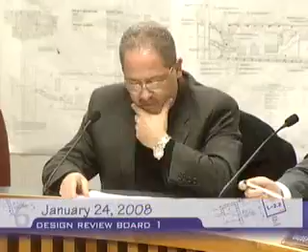Okay, good evening. Welcome to Design Review Board number 1 again. The first case is 1 PDR 2007-140B, 1234 Irving Avenue.

Good evening, Mr. Chair and members of the board. Presented before you is case number 1 PDR 2007-140-B, located at 1234 Irving Avenue. The applicant is proposing to construct a 2-story house, which will be 1,852.5 square foot, of which 991.1 will be on the first floor and 861.4 square foot will be on the second floor.

This case was first heard on January 10 of 2008 as a final review, and the decision was made to return for redesign with board comments. I will quickly go over the board's comments from the last hearing.

First comment made by the board was to eliminate the second story balcony in the rear of the building. As you can see, posted behind you on the left side are the old plans, and on the right side are the new plans. The applicant has met this condition by eliminating the second story balcony in the back, which was imposing privacy impact on the neighbor to the south of the project.

Second comment made by the board was to look into the options of eliminating the balconies and open terraces overall throughout the project. The applicant has reduced the number of open terraces and balconies by about half, according to the applicant.

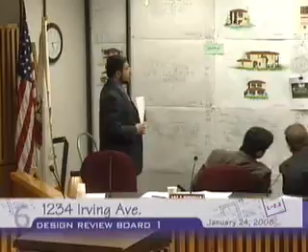The third comment was to explore the options of relocating the entrance to the front of the building. Initially, the applicant was proposing to have the entrance to the side, to the south side of the building, and the applicant has decided to move the entrance to the front of the building, which is seen on the site plan right here. So the applicant has made that comment too.

Another comment was to switch the family room, the kitchen, and the dining room to eliminate patio area in the back. The applicant has switched rooms around. As you can see on the first floor plan, the family room was in the front of the house, and now it has been relocated to the back of the house.

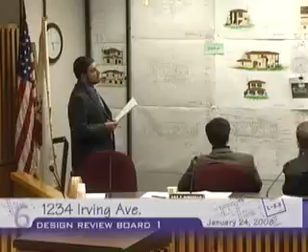Staff also has some comments. Staff believes that the applicant has artfully fulfilled the comments and conditions made by the board. By removing the second-story balcony in the rear and relocating the entrance to the front, the applicant has attempted to eliminate the privacy impact that could be potentially imposed on the neighbors to the south of the project site. The design is consistent with the neighborhood, which is Spanish. The proposed project is in compliance with the zoning code, and staff recommends approval of the project.

The applicant is in the audience, and if you do have any questions, I also will be available. Do we have any questions from the staff? So there was one comment, the second and the third.

Could you repeat the board comment or staff comment? The board comment was to explore the options of relocating the entrance to the front of the building. And how was that?

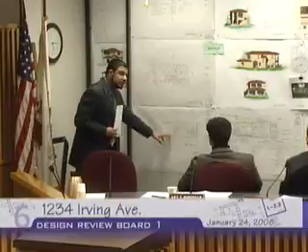As you can see on the initially proposed site plan, the entrance is on the side of the building facing south, and the applicant has relocated it from the side to the front, which is right here.

And what's happening in that little patio? Is there a patio? This will be, I don't know if you want to call it a balcony, a covered patio. That will be right here? Yes, it would be this one. So that's where the old entry was? Yes. But the street is that way? Street would be here. Okay.

And then what about number 3? I think that's a comment. That was the comment, number 3. What was number 2? Number 2 was to look at the options of eliminating the balconies and the terraces throughout.

The concern was that all the balconies were covered balconies rather than open balconies. And the concern was to eliminate basically the overhang above it or treat it differently so we actually reduce the mass.

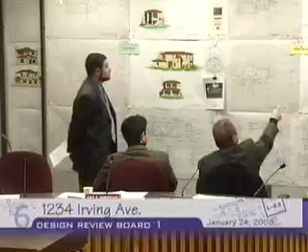So this right here, there was a balcony here. Yes, that was one of the issues. But we had other balconies in front which we can see there. Even the second-story balconies in the front, he has maintained them, but he has reduced them in size. I will let him go more in depth about those.

Question for staff: with the new system, was this one of the projects where the applicant got together with staff and went back and forth on it initially? As submitted, no. But when it was returned for redesign, the applicant did submit the plans. We did not have color elevation right away, but I did run it. I did take it by Stephanie. She did look at it, and she did feel that the applicant has met the condition.

Comments. Okay, any other questions from the staff? No, Mr. Moynihan? No? Thank you very much. All right, let's move on.

So I have a couple of cards on this project. Mr. Edward Hagopian, please state your name and address for the record. Good afternoon, Mr. Chair and board members. My name is Edward Hagopian. I'm the architect of this project. My address is 220 South Kenwood Street, Suite 210, Glendale, 91205.

That's my address. I believe I have responded to all these comments of the design review board. Other than that, I don't have much to say. If you have any questions, that will be it, because the only thing I would like to mention again is that I am very sensitive to the houses that are east-west.

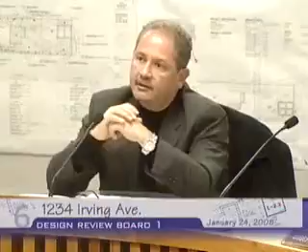It's a covered patio, but the main thing is that the living room and family room have been moved to the rear of the house, and I've eliminated almost most of that patio in that section. The entrance was removed from that side and replaced, since the neighbors' concern was people entering from that side. Do you have any questions from the applicant?

Thank you very much, we'll call you for rebuttal. So the second card I have is Sarah Conrad. Please state your name and address for the record. Sarah Conrad, 1232 Irving, we're the neighbors to the southwest.

We think the building looks a lot better from the street, and more balanced from our perspective, and we appreciate having the balcony eliminated. As far as the sun beating down, they do make window shades. We have five windows on our rear elevation, and we've lived there 28 years without any shades, though this past summer we thought we ought to buy a shade for one of these windows. So I think there are ways to work around that without adding the balcony back onto the building.

I like the landscape plan. I see a landscape architect did it this time, and it really shows the improvement. I just had a question about the wooden fence, what the height would be. I couldn't see if it was specified, whether it was going to be 5 feet or 6 feet.

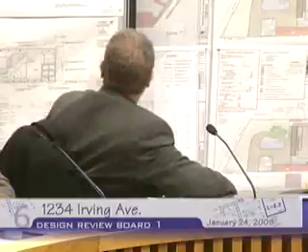I think this could have been treated a little differently. I see this area here - when you're entering, we're not taking advantage of this space, and to me this is like a redundant patio. We've got patios - like 6 patios in different places.

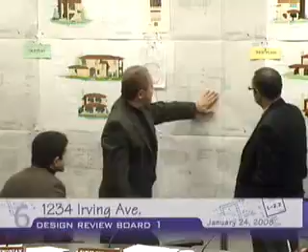I appreciate what happened here, because this is the correct way of doing it, where we have the family towards the recreation room - that was one of our comments, which is fine. So you've got the kitchen, and plan-wise, the kitchen, dining, family, and living are working fine.

But the problem is that once we did this, suddenly we have a bathroom right in between 2 patios. So I feel that this area here is kind of weak, and the function shows in the final product. You have all these niches, but in reality you have this wall that is really just a plain wall.

Here is the entry - the nice entry feature he had with this precast element, which was very classic and very nice. That's kind of lost. I was hoping that when we brought the front entry from the front, we could have incorporated some of that over here.

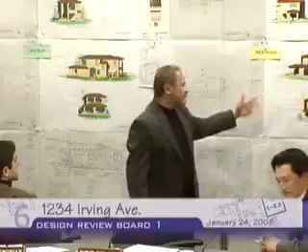And this, going in and then entering from the left-hand side, it's just not justified. I mean, we can go ahead and approve the project. I'm not saying this is a make it or break it, but I think there's room for improvement in this area, and it's kind of a shame to just let it go.

As far as the fireplace is concerned, I concur with Mr. Aliano - sometimes when you have a fireplace that serves only the first story... one way of handling that is if it had been connected to the second floor somehow, with more space or some sort of closet, then we wouldn't have had to have this thing sticking up.

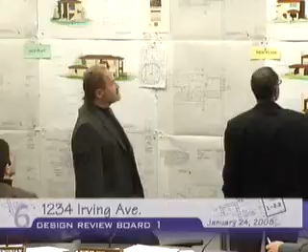So those are the discussion points I'm concerned about as far as the design is concerned. I think he has responded in their own way. I'm very happy about the landscaping - I think this is a good landscape plan. But I think the front is just kind of weak to me.

And if there's no way of improving it, that's different. But we're not dealing with an addition per se - this is basically a brand-new building. So when it's a brand-new building, there's so much you can do as far as the entry is concerned. And still, I understand Mr. Akopian's point about the west and east - it's a very good point. But the thing is that this is now cantilevering out, or overhanging about 6 feet or whatever we have there.

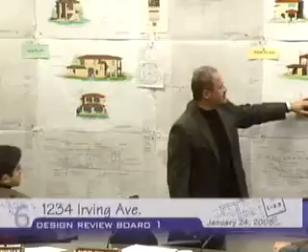Normally, we could have had the same amount of shadow here if it was not cantilevered 6 feet, or if this was over here, for instance, it would cast the same amount of shadow over here. So some sort of a compromise could have been reached in this area here.

And I'm not too sure about this, but this area here, there was a privacy issue, which he's eliminated the balcony. So I'm okay with the back side of it. My main concern will be the front of it, which was lost in this whole exercise.

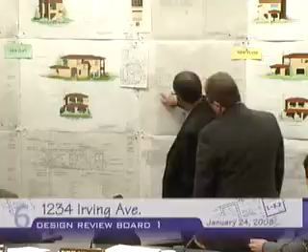And I don't want, even if we approve it, I don't want this thing to be viewed as we have prescribed this entry, because I don't want to put my name on this entry. Is it possible, Mr. Agovian, if you stretched this out more, and put the entry right there in between the two forms?

In other words, you could actually even make your bathroom bigger. I don't know if you can add more square footage, probably have the FAR. I think what he was saying is that if he brings the door over here, it's kind of narrow, and he gets a narrow window and narrow kind of element over here.

So his concern from the beginning was this, that this is narrow. That's true, we said it is narrow. We understand that. But I'm just questioning, why do we actually need this? Why doesn't this continue like this, so you can see the door itself?

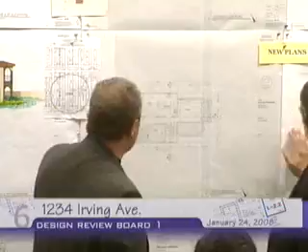Or why can't this elongate over here and then put a nice door over here? Forget about this patio over here. But this could be the entry right here, right? Yeah, that's what I'm saying. It could be the entry right there.

Now, he doesn't want to come right in front of this long corridor, which I understand. And then he doesn't want to, with the same token, open the door and face the wall there. There is quite a bit though. But if the doors were here, you're entering a vestibule, right?

Square footage, square footage. Mr. Akopian, we'll ask you. Well, Mr. Ariana asked me questions. You don't have enough FAR for that. We have 1 square foot left. One, yeah, the thickness of the door.

Well, again, it's one of those things. It would be nice to have it facing, but.

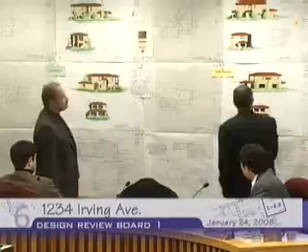I wonder if there's something that you can do on this wall, maybe a niche or something that kind of marks it. Yeah, I can put the same thing that we had on that facade into this, some tile work on this wall that sort of marks it in plan, right?

If he puts something like this there in the entry, then the door has to actually face us. It really defeats the purpose of putting the door there. I don't know about this wall here, if you create like a niche. What's appealing about that elevation is the fact that there is the border around the door, the entrance, and then this very nice, eloquent, classical.

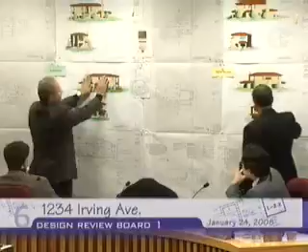Yeah, see what I'm saying? If this was the front of the building, why don't you make this solid? Why not make this solid and carve that door here? And even if the door is not there.

We will ask you, Mr. Akopian. So what I'm saying is, if this was not here, like an island, if this was over here, then we have an opportunity of having a rhythm like this, where this is actually going to be a nice entry courtyard. So you could have had a nice entry courtyard when you're coming in. Right, we're not going to obviously design it for them, but he's got a point.

He's got this balcony that ends right up above here, somewhere in here. Somewhere there. Yeah, so he's trying to reconcile all these things.

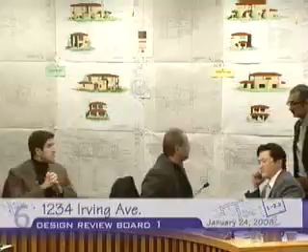Okay, it's just no, my very good point. Personal, I agree with your feeling. I mean, if you guys are okay with it, that's fine. Well, at this point, unless we haven't reworked it. Okay, I don't know how you feel about that, but all right, then. I was not, that's fine. Do you have any other comments, or do you think?

I think if we are going to accept this entry, it would be nice for that back wall to have something, so that when you have some kind of axis that leads you to that point, even though it's not the entry, it's quite typical of this style to have things on walls that create focal points. Typically when we have a corner, a 90-degree setback, the entryway is kind of a short turret that you enter on an angle, which we don't have here. We see other Spanish-type buildings done the same way.

What compromise could have been made is that he could have used the same precast entry and everything, and perhaps come in, not necessarily putting the door in front of it, but on the side. At least it would announce an entry there, rather than just having these niches that people will just come in and then go in.

The thing about this is that you have sort of a point sitting on this roof, which actually visually has no support. There's nothing visually that ties this to the base of the building.

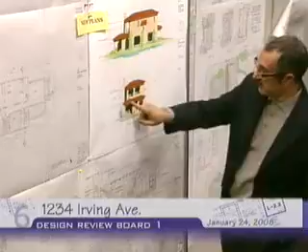I wonder if through the turret here, this could be brought in where maybe it aligns, so this patio may have three arches or maybe something else. Then you can elongate this piece a little bit and still make it an exterior patio, but now you'd have more of something like that. This could even have some other shape.

Maybe it could be diagonal or something, sort of typical of this style, where you have turrets in these kinds of buildings. So you could do something here where you come in and enter, which is actually, you drive anywhere, even in LA, you have these buildings with turrets, little turrets, where the entrance sometimes isn't seen, but you do see the little turret, a defined aspect of it.

Maybe that could happen here, which is easy to do, I think, without adding square footage. The only thing that would have to occur is that this balcony here would have to be brought in, which eliminates that door.

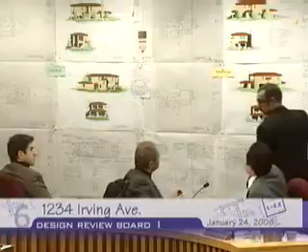That's better. Well, that's one way of looking at it, to create that turret. But let's say if it's turretless, at least if he has a strong element over here, generally speaking, normally this is like a fixed window, a picture window, a nicely treated window, so it goes away from all this, the same type of roofs and everything.

You know what I mean? So if this was that kind of treatment in front of the living room, we could have left this side alone, let it go by, but this could have been a small loggia or something. If this distance equals that distance, we can see there will just be a colonnade over here, so when you're entering, you can enter from the side, into the colonnade, rather than having it in front of you. So those are the combinations I'm saying we could have there as an entry.

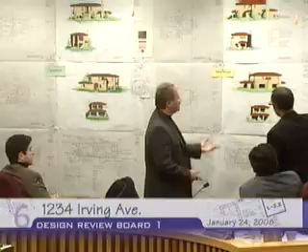So I don't know if there's any way we can put some sort of condition that he would rethink that area just for the entry alone. Well, perhaps staff can review it, because I believe that based on the new procedures, staff has a sort of... I believe, say so, yes.

Staff's priority was to review that the very specific comments and the intent of the comments were satisfied.

So we did not do a more thorough review or question some of the elements, such as the chimney, the window pattern, etc. We can do that in the future if the board so directs us or would like to see that. So that's just for your information.

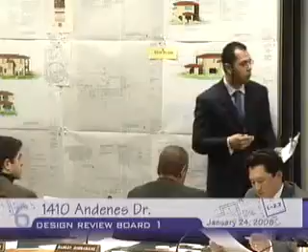Good afternoon, Mr. Chair, board members. The next case item before you is case number 1-PDR-2007-121-A, located at 1410 Andenes Drive. This case was continued on January 10th. The board had a few comments. The applicant was able to provide the plans as of this afternoon, but staff has not formally gone over it. To get to your comment, Mr. Simonian, it has not gone through our urban design team to look at the design concepts.

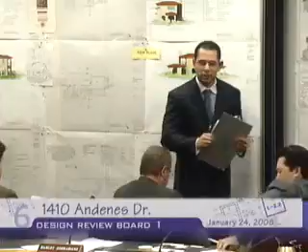We did look over zoning issues. It does not appear that the square footage has been adjusted drastically—the applicant can definitely verify that—but I can go over the comments and conditions the board had two weeks ago. Condition number 1: the applicant was to provide eighth-scale plans for better clarification and clear depiction. Condition number 2: provide 50% calculations to reassure that the scope of work will not trigger new construction regulations. Condition number 3: provide a site plan overlay of both proposed first and second story. Condition number 4 was to restudy the fascia board size.

Condition number 5 was to restudy the south elevation. Number 6 was that the color chart appears too dark; the applicant has provided a new color scheme. Condition number 7 was to restudy the placement of the shutters.

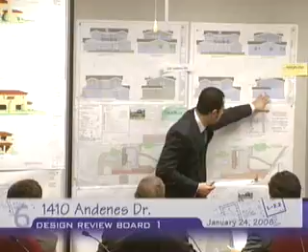These are the previous plans the board saw on the 10th, and to your right are the new submitted plans. The applicant has removed the shutters and introduced a new window on this elevation. The applicant has also indicated calculations stating he is not demolishing more than 50%. I have not yet verified this with building and safety, but it will happen.

That basically concludes my presentation. I'd be happy to answer any questions.

Do you have any questions from the staff? The applicant has provided some responses in letter format for the board members.

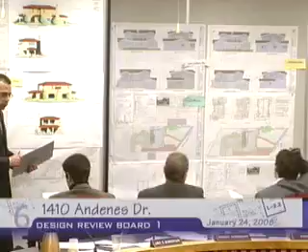Insofar as the south elevation, what have they done as far as changes? It was regarding that this elevation lacked detail. As I'm seeing here, the only thing we did was the removal of the shutters along with an introduction of this window.

Did we ask for the shutters to be removed? No, the idea was to make them more compatible with the overall design. We never said to remove them. In fact, it looked much better with them on than it does today.

But again, it hasn't gone through the urban design group. It's just come back quickly. Correct, it was within the two-week span.

Can that be fixed? I mean, why should we look at it if they haven't had an opportunity to look at it? Just because we wanted to have it fast? No, I think whenever we send cases for continuation it's because of not providing information.

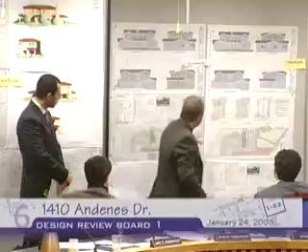In other words, we lacked information. The way it was presented to us, when you see the site plan, it just shows the roof. We really didn't understand what the plans were, the adjacencies. The plans were not shown before. So we wanted an eighth-inch plan superimposed on the site, so we could see the proximity to the existing trees, which are important, and how they're laid out. We still haven't had that plan here.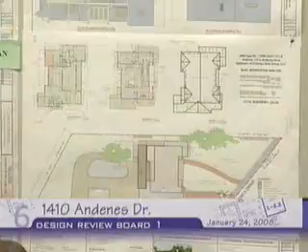No, we have the eighth-inch plans here, but they're just not on the site themselves. And this is only trying to answer one of our concerns: are we going over 50% removal? Because if that happens, our setbacks are different than before. So we clearly didn't have enough information last time. That's why we continued it.

Well, I have a general statement to make, but I don't think it's a question for staff, so I have no questions for staff. Thank you. Okay, thank you very much. All right.

Okay, so I have only one card here. Rafael, yes please, state your name and address for the record. Rafael Quezada, 787 West Woodbury Road, Altadena. Are you the designer of the project? Yes, designer of the project.

With respect to the overlays and the eighth-inch scale site plan, as I understood it, you needed to see how they relate to the setbacks and so forth. So, can I approach the chart? Yes please, the pointer is there if you need it.

These areas here are now more visibly shown. This is the area that is remodeled on the first floor, this being the first floor plan. There's a small area here, an addition to the family room, an addition to this bedroom. The next shows the same color scheme with an overlay of this violet color, which is the second floor. These match in the same color scheme, more or less, where red shows the addition, the main part of it. There's a small porch addition, but it's really not an addition, just a remodeled area. The outline matches this site plan so you can see the setback to the trees.

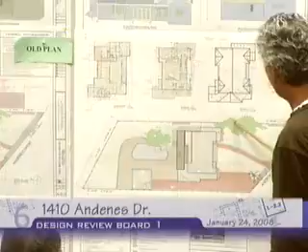I want to clarify, on the 11 by 17, as I was trying to explain, the city's printout requirement is to reduce the entire plan to fit 11 by 17. It didn't wind up perfectly at 1/8 or 3/16 scale; it had to be scrunched to make it happen. So what you saw was inaccurate, and I didn't catch that, I apologize, but what you saw was not accurate in terms of the setback or the driveway. This is a 9 foot 2 inch driveway.

It meets the requirement. This is a 5 foot plus setback, which meets the requirement. So in terms of what might be triggered regarding new regulations, those are not issues.

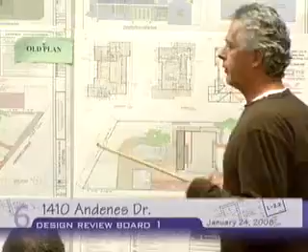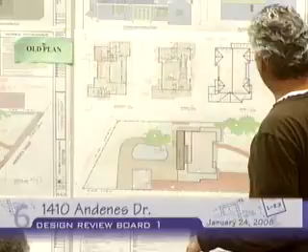In terms of the modification of the building and the percentage I arrived at, what I did was calculate the total lineal footage of all partitions, exterior and interior, and gave them all a nominal 9-foot height. Then I took the walls being removed, interior and exterior, with the same nominal 9-foot height, calculated percentages, and came up with 13% in terms of partitions. Then I took the roof in terms of its overall plan and how much of it was going to be modified, and the two added together and divided as an average came to 29.5%.

I have a comment to make there, because this is not the way it's calculated in the city of Glendale. The calculation does not include the interior walls, only the exterior walls. In that case, it's even less. It's fine, okay.

What we care about is that when we go ahead and approve these plans, when it goes through the process, there are a couple of things that can happen. First, you can come back and say, well this is approved and this is the way I have it. We want to eliminate that. Maybe not you, but some other person or whoever.

Second, if it goes through to construction, there's no approved prescribed definition of what is 50% or not. And it's bad for you, bad for the city, and it creates misunderstandings later on. Now, I understand we can monitor that, but everyone, at least when putting the information there, should stick to the prescribed method.

What you need to do is take the exterior area of the exterior walls plus the area of the roof itself together, because they both count. You could be removing most of the roof but not removing the exterior walls, so there's a balance there. There's a particular method to calculate it, which is not what is already indicated there.

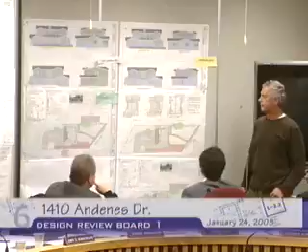But if you add the roof area—you're saying only the exterior walls? Exterior walls, nothing to do with the interior. Interior walls come into play for your sprinkler system, but when you go through building and safety, they're going to look at that in addition to what you're doing.

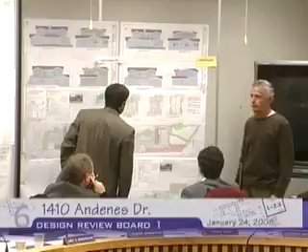So I erred on the side of caution in that I did include the demolition portions of the interior, and this probably is more like 25% overall. When you qualify the roof area that's going to be affected, you're virtually removing most of the roof in order to retrofit the second floor. There is re-roofing of the first floor required, but it's really a cut-in and modification of framing. Part of the scheme of the design is to maintain the existing house as it was previously, only modifying where re-roofing is required or where a match to a certain line is necessary.

You realize that based on the description, if it goes more than the 50% removal rule, then you're going to observe new setbacks—your minimum setback will go all the way to 10 feet. That's what I'm trying to tell you. Sure, I understand what's at stake.

Okay, so is there more square footage being added on the second floor compared to this plan? No. Honestly, I don't know how this got here, other than there was a draftsman working at that time, long ago when we made the submission.

This diagram matches this footprint. There you go—we had concerns about that too, because we couldn't read that plan well. It was impossible to understand the overall layout. This is the actual footprint, and you can see how it lines up here.

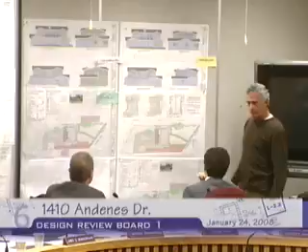Right, so that kind of concerns me about your roof count on the percentage, because it doesn't pass the eyeball test. That's more than 46% of the thing you're going to have... but that's not as big a combination as all the exterior walls added to that. Right, you might be under 50, I'm just saying it's probably closer to 30-something than 20.

The thing is, if we miss something, you'll get caught. No, it just makes things more difficult, that's fine. We're trying to make it easier for you to disclose. No, I understand, and I appreciate it.

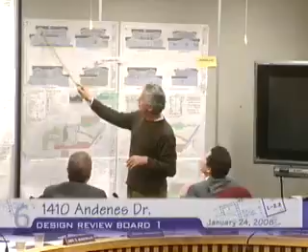The question regards shutters. Your objection, Mr. Simonian, as I understood it previously, was that it didn't make sense to have the shutters if they don't match on the other side. You took issue with why these shutters were here when they should be on both sides of the windows. My response was that the owner wishes to keep the existing scheme on the house, and to balance their desire with your aesthetic concern, since they don't want to change all the first floor windows and want these to match, the solution seemed to be to eliminate the shutter if it doesn't make sense to the board, so now they all match and the first floor windows didn't have to be changed.

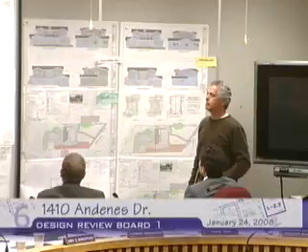Well, without getting into a long-winded discussion, I think there was a misunderstanding. Did I mischaracterize your concern? I think there's something nice about the shutters, and for a one-story home it does work. But you're saying this doesn't make sense if it's only on one side of the window. So if you want to keep the shutters, the solution is to change the windows, but you're imposing a huge cost and expense on the owner to change out windows just to match an aesthetic concern.

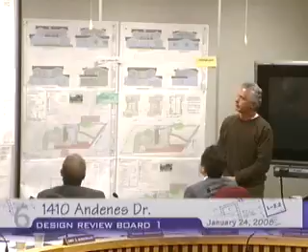So if the shutter is the issue and it can't match, then... Again, without going really into it, which I don't think is the time to do right now, but you're missing my point. It goes back to some of the comments I made earlier, where we prescribe some conditions and it's very easy to just check off the box and say we've done it. However, that is not the case here. So we'll address it, but I did have some questions for you.

Specifically about the color, we mentioned item number 6, where the color chart appears to be dark. Did you introduce new colors, or is it the same as before? It's the same color. We eliminated the black that was going to be a feature, a black shutter, but that Admiral Blue is the color they want for the house, and it's not out of line with many of the other houses in the neighborhood.

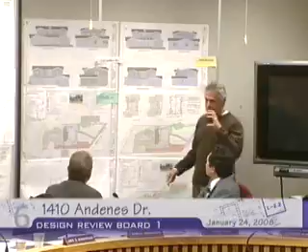And the other thing is, in terms of visual reaction to light, the darker color presents a smaller visual image than a brightly colored house that reflects more light. So the owner felt that Admiral Blue is the color they want, and they would eliminate the black, which was going to be a feature of the shutters, since the shutters are no longer part of the design.

So I can see that the fascia boards, you made them more realistic, going from 11 1/4, which would be nominal 12-inch, down to 7.5 for the 2x8. I think that comment I made was because the existing house looks much lighter on the roof than what you were depicting—it was kind of heavier on top. To balance it, we also made these match; they're now 7.5 rather than 5.5, which were 6x6.

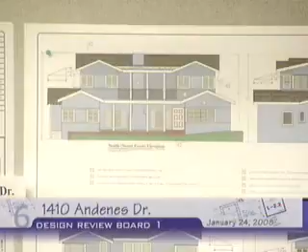There are also a few details you're changing which aren't depicted here. The existing house has wood siding on this side on top of it. Are you eliminating that? I think it didn't read well. You see what I mean? Because on the front, that's on the front.

That's the front of the house. Right, on the back, it's stucco. No, I understand, but I mean the front of the house, because you mentioned they want to keep the existing treatments and all. I don't believe that's...

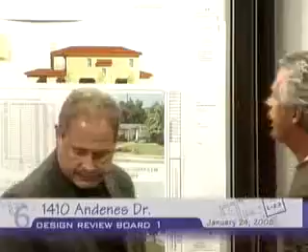No, you're looking at the roof, that's stucco there. But in answer to that question, the engineers weighed in, and because there's going to be some shear walls required, this is probably all going to be siding.

Nice. So on the site plan, is that the existing footprint of the house? Yes, this is the more accurate one, although the footprint of the existing house hasn't changed. It was this that was off. In other words, this is just a plain old existing site plan that portrays the existing location of the house as is. Right here, and here as well.

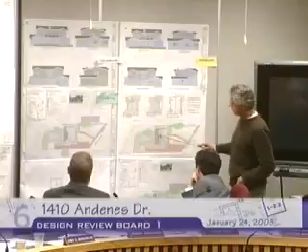This color, but that pink portion is an addition portion, correct? Exactly, this is the addition. And then you're also portraying the second floor, illustrating the second floor addition on this violet line.

That was what I understood was what you wanted, in order to be able to see the net effect of setbacks to trees and so forth, and the setback to the rest of the house, in terms of addition versus existing.

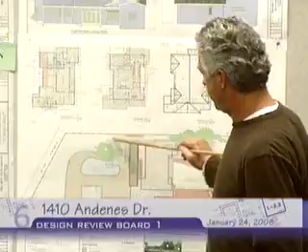And as far as preserving the protected oak tree, totally, do you have recommendations and everything already? Yes, and this is a sycamore, not an oak. The other one is the oak, and we're well beyond the 10-foot requirement on any new construction from the city.

Yes, I've talked with Bill McKinley. He's visited the site two times, and we've gone over and over what are solutions when you have to be up close, because I had another project where we did have to be near. So we've actually gone through the entire ordinance in terms of preservation.

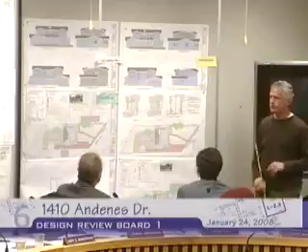But he gave you recommendations and requirements? None on this project. Well, the standard is you protect it, and you cannot allow the root structure to be disturbed. Generally speaking, they give you that information and you include it in the plans. Right, that's why.

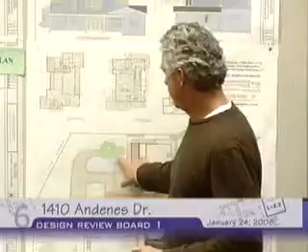It wasn't a requirement on this project because we're 20 feet, 32 feet, and 26 feet from this. Generally, when you're under the drip line is when all these larger concerns are triggered.

And I understand that, but not necessarily that's the only time, because whenever you have a protected oak tree, there are some prescribed requirements that you cannot disturb the tree itself, because during construction, when you're not there, people are going to go underneath the tree, they might by mistake dig underneath the drip line. You see what I'm saying? If you don't have those notes, those requirements there, that it needs to be protected. So we noticed those notes were missing from last time, and that was one of my concerns.

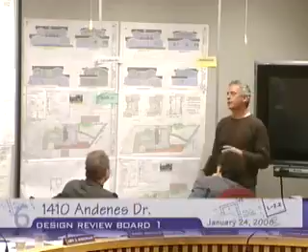What is the material of the existing fireplace? It's a slump block made of concrete, made to look like slump, like adobe, a typical concrete block. It's been painted over time. So again, they don't want to remove that, so we're going to add the same type of block in it.

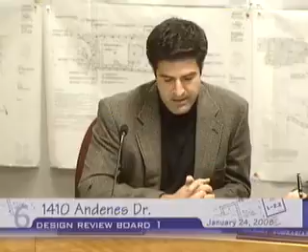The idea is to use this board and these comments to bring it back and make it a better design. I don't think that occurred this time because there were only 2 weeks, so the group hasn't had time to opine on it. The staff hasn't had time to really focus on it, and we haven't really received any drawings. We just got the conditions, that was it, and we're looking at the drawings for the first time.

A lot of the comments I made 2 weeks ago stand, so I don't think I should go over them one by one. I think the applicant could simply get the tape and hear them out and try to understand it.

But I think this is one of those instances where Ms. Reich is going to have to work very closely with the applicant to go through this process, because this might take a little bit of effort. As I was saying, this is one of those instances where it's going to be beneficial for your group to really sit down with the drafter, with the designer, because I think there's going to be miscommunication going back and forth. It's happened in the past, and we're trying to avoid that.

I'm not going to go over my comments again, but there's a lot of work to do. There are a lot of details to provide. The shutters absolutely need to come back. Everything that was said 2 weeks ago hasn't been addressed. So, Mr. Chairman, those are my comments.

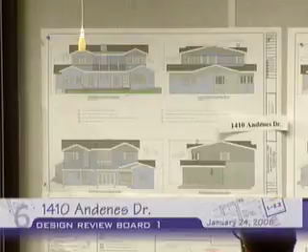Because you can see it, you just have to squint and hide this. It's like two houses, one on top of each other. There's no integration - the only thing we see that's integrated is maybe these columns that kind of penetrate through, but even that, it's still not. It feels almost like a duplex, because you've got this veranda that ties two units together, and it has an entry here but doesn't really have an entry there. The symmetrical nature of it really, I think, is not what this project needs.

I think all you got to do is look at this picture - it says it clearly. There's a really nice asymmetrical quality about the project that it would be great to respect and build from, rather than dealing with symmetry. It looks massive - I know this house isn't as big as it looks, but with all these little gables matching one side to the other, and at the top it's almost like a 70% reduction, like you ran it through a Xerox machine and put it on top, but it's the same thing. I think this needs quite a bit of study in my mind.

So I don't know that I can even work with the details, because I think the massing of this project, in my view, needs to change so that it really captures the quality of the existing building and captures the nature of the existing building too, which is not really about symmetry.

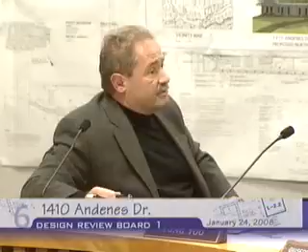And the neighborhood is quite beautiful. I mean, there are fantastic houses there. Besides a few of the structures that I don't want to mention, but there are beautiful houses in that area. We don't want, I just want to make sure that this addition is not going to change the whole landscape there. And it's a house that you see immediately when you're driving up.

So, no, I agree with your comments. I don't want to drag this more than this. I think they definitely have to clarify their plans. That's one point. But I think the staff wants us to be a little bit more specific as far as when we are saying we want clarity on the plans, what we are expecting. And that we need to have clarified. Because otherwise they will come back again and then we'll have superimposed plans on top of each other.

No? No? We're okay. All right, so the staff is saying we're okay. Great. This is good. We made some comments already, so I think, so it's okay. Yeah, all we need to know, we've heard your comments this time, and if the repeated comments are as were recorded in the staff report, then I think we have enough information to work with the applicant prior to it coming back to you.

Excellent. Thank you very much. So with that said, is there a motion?

You can go ahead, and I'll second it if you want to do it. I move for this project to be redesigned. Come back for redesign? Come back for redesign. I second that. I think that's the right way to go.

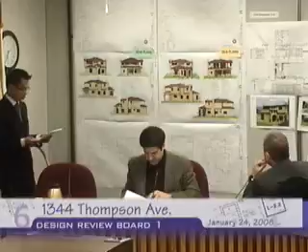The applicant is proposing to add 197 square feet to the first floor, a brand-new second floor of 941 square feet, to an existing 1,293 square foot house. The total floor area at the completion of the project will result in 2,431 square feet of livable space.

At the last meeting, the board made several comments concerning some design elements on the overall project, which touched on the rotunda, the balcony to the rear, as well as the setback and the treatment of the exterior, which I can go over if you like.

But otherwise, I will run over the changes that have been made by the applicant. I have placed the old and the new plan side by side. The new one is on the left and the old one's on the right. As you can see on the front elevation, the rotunda element still remains. However, it has been reduced in scale and also in terms of the design. The columns have been removed and the size has been reduced, although it appears that it is a little bit higher than the previous entry element.

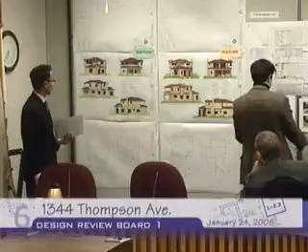The other comments the board touched on concerned the rear balcony, which originally the applicant proposed to treat with stucco. The new design shows wooden posts instead. That was a specific statement made by the board. Also concerning the balcony, the board suggested that maybe the roof could be removed or the size of the balcony reduced. However, the new design still shows a covered balcony and the size remained the same.

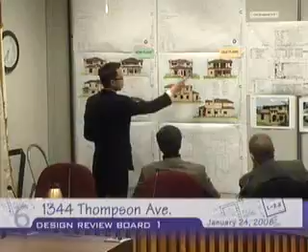The other comment concerns the veneer being used, where the board stated to consider removing it and using stucco on the entire house. So that's what the applicant did in this case. And regarding the front setback, the applicant has changed the setback to 28 feet, which is consistent with the property to the north as well.

So that, I think, pretty much concludes my presentation of the changes that have been made.

The material board illustrates a composite shingle roof, but the elevations illustrate some sort of terracotta tile. Which is it? It's the tile.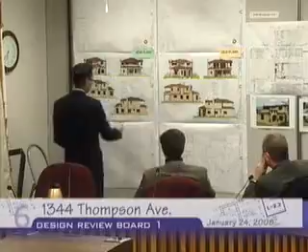Are these the accurate colors? Is this the latest set, the only version we received? You can see the colors changed a little, but I believe it still remains the same.

Is that correct? The applicant is here to address the issue. Do you have any questions from the staff? No. Thank you very much.

Okay, I have one card. Franco Naravian. Please state your name and address for the board. Franco Naravian, 409 West Broadway, Glendale, California, 91204.

I'm the architect for the project. Basically, one correction, the balcony.

It may not look like we reduced it, but it actually is 18 inches smaller. The porch in the back is 18 inches smaller, not much, but a little bit smaller. We decided to keep it mainly because of concerns with rain and sun beating down on the doors, and we wanted some protection. The color, maybe you can look through and find the right one, but that's not the right one.

It's a two-piece S-tile, kind of brownish in color. And the exact stucco color is kind of in between what we had submitted on the old plans and the new plans. The color is in between those two.

As far as the main area of concern, originally we had tried to match in massing and setback the property directly to the north. That did not get approved, so last time a suggestion was made, and I thought it was very good, to take the mass from the south side out of the building by pushing the entry in at that corner. I think that worked, and it's much better.

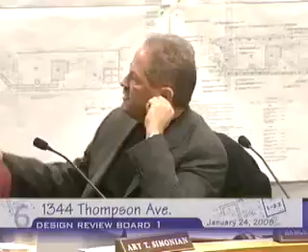No, we will discuss that, but I was just wondering what happened there suddenly. Okay, anything else? No, that's about it, if you have any questions. I couldn't tell from the drawing—the windows, what are they? Wood windows. Yeah, wood windows.

Is the color correctly represented in the three-dimensional drawing? No, I wish we could find that. The correct color is between the old plans and new plans elevations. On the perspective, I can't get my computer to print the exact color, so it's always a little bit off.

What do you call that—beige, some sort of off-white color with a brown. The roof is really kind of brown. The roof we're proposing is not your typical red clay tile roof.

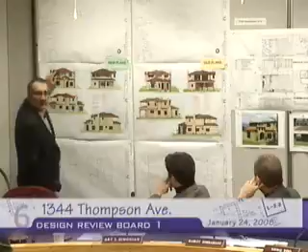There's actually a gable here, huh? No, that's a hip roof. A hip roof? Yes, they're all hips. I think we used to have a gable, and a comment was made to eliminate that gable, so we did. So this is the only gable you have? Yeah, and that's because the master bedroom is vaulted. That's the only reason, and that's on the side yard.

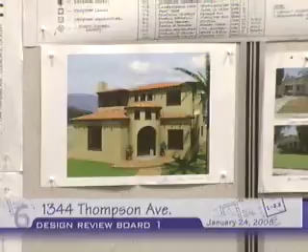You introduced wood posts and corbels and everything. That's what we were actually suggesting to do. It's just that the sizes of it look more country to me. With all the braces, couldn't you beef up those posts to a heavier timber look with corbels? You could go to 8 by 8. What are these now? They're probably 6 by 6, but I can make them 8 by 8. Yeah, 8 by 8 would be nice.

This is what I kind of didn't like, but it could be remedied - this plaster that was added there. You're gonna get flashing there too. But it's in the rear, right? Yeah, they had a railing over here. They could have introduced the top railing there to open it up a little bit.

By the way, I should mention the idea of the rear porch came from the property to the north, which actually has a much larger two-story rear porch.

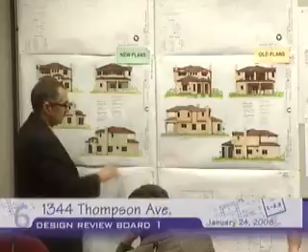Because you end up with a very strange tiling at this corner, cutting the tile there - you have a hip and then you have to step down. It'd be a lot cleaner if you stayed with the intersection of the hip to this plane. What do you think of that? Yeah, absolutely, I think it will look better, much, much nicer. And it will reduce everything - it will reduce this by a bit.

If you recall, this was a house in a neighborhood that was predominantly one story. Right, and we were trying to find avenues to justify the second story, which is allowed, but we had to massage the setback and do some front redesign and so on. So it's working out good as far as the stepping back is concerned.

The windows are all wood. Did you classify this as kind of contemporary Spanish? I think originally I had said Mediterranean or Tuscan, but now it's looking more not Tuscan - you don't have stones and stuff. What I'm trying to say is I'm looking at the entry, and on top you have like three windows side by side. It's just not what you see normally classically in these kind of buildings. If it's a contemporary treatment, that's a different issue, but to me everything is looking more rustic - you get a nice, authentic, heavy beam feel.

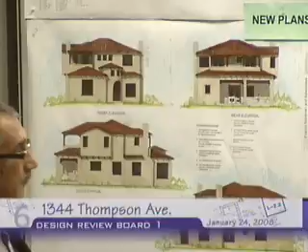If the entry was made higher, then you could just put a nice lantern, a giant lantern that is Spanish looking. It would be much nicer that way, right on top of the entry. And you can actually add, as far as I'm concerned, some sort of a detailed surround with precast or something.

Actually, a nice ornate tile or precast could be very nice. You could create a little peak here, kind of an Adobe detail, or bring something up, have a little more...

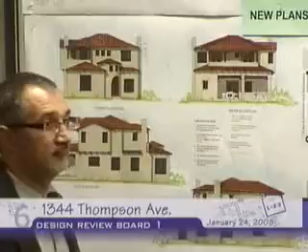And that would be much nicer, because plan-wise it works better now. This is much nicer, that you're entering on the side, and you have the entry there, and it just goes very nicely.

And what about this window here? That's the main window of the living room. Didn't want to have a nice larger picture window or something? You mean like why have an arched divider inside? How about not lowering it and making it really a big picture window?

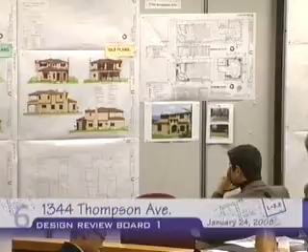Yeah, we can do that. Does the TV go behind that wall? No, TV doesn't go behind. Because that's going to tremendously improve this thing, if you can lower it and make it much nicer, a picture window, all no operation, just one big glass.

Exactly, one big glass, and that will approach the intent, it will be much more classical. I would even try to see if you can bring some of the detail on the header. Yeah, that's a good suggestion, I like that. Tie that in, because then this is the entrance round, and you have a little detail on the header to match that.

Beautiful, sure, you got this and it will look great. So, good work. And the only thing, Mr. Naravian, that would remain is this.

I still don't understand what happened to our nice overhangs and everything here, suddenly, because when you're driving there, you're going to be seeing it. I know it's easy to take, but I mean, I don't know why it is, but I mean it diminished. You mean the corbels here? Well, this is what they had. It was much nicer, you know what I mean? But it just kind of diminished afterwards.

I think it's a plan thing, right? Yeah, it's basically the room got a foot bigger because we took away some of the square footage that was in that front corner. I applied the square footage elsewhere, but if you want me to. Are you right on the setback limit on the second floor? Yes. Can you go out one more foot? No, I cannot go out, I have to go in if you want that cantilever.

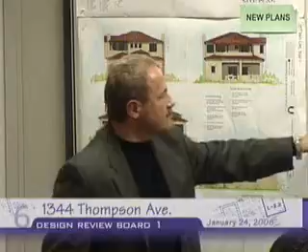And without the corbels, right? But I mean, if you're going to be using that detail, actually the corbels should be replaced there, should be there. Okay.

And then the windows are wood, right? And are you going to be recessing the windows a little bit? Or what are you doing for your exterior? Is this a brand new building? Well, it's not brand new, but... You're going over technically 50%? No, we're not going over 50%.

The existing house has a flat roof, and I'm keeping all that. Are you going to be keeping any of the existing windows? No existing windows. But, okay, so the problem is that we just had this discussion on another project I'm doing. To recess the window, the walls have to go from 2x4 to 2x6, and usually that's an added cost that clients don't want to incur.

So if it's... $1.80 a stud? Well, I'm just telling you the interaction I have with clients. So if it's possible to do maybe the front windows or the windows that are visible, and not all of them, that would help the client, but...

But you know what, Franco, these buildings look really great when the walls feel thick. You're lucky you don't have to build it like they used to, when the walls were 1.5 feet deep, like in adobe. So 2x6 will give you deeper windows, you get the insulation value, which is a plus, and it makes a more efficient house, energy-wise.

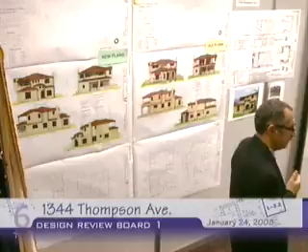But even with a 2x6, you could still figure out a way to flush the window in the interior. Even with a 2x4, you could do it—I've done it. You could flush the windows on the interior. You'll probably get maybe an inch return plaster, but it's still a lot better than making it flush.

Can we try to qualify our comment? Do you want to give me how much? What are you looking for? Well, on a 2x6, you flush the interior and whatever you have left, you get at least 2.5 inches.

Okay, thank you. Excellent. All right, any additional comments? Mr. Yu, you didn't say anything.

No, I wasn't here for the first few review times, but I think the design—you've dealt with the changes, and you've made the building better. I think the color is a lot nicer, a little more muted. The tile actually gives it a nice contrast, and it's well done. I think the entry has gotten a lot better with the stone, not making little pieces out of it, but actually getting rid of that and making the whole thing as a whole.

I would concur and say that maybe the entry you might want to make a little bit even higher. I think it kind of loses a little bit of prominence as it hides behind the front mass there. So I would be okay with going a little higher on that.

Window-wise, I think you have a good point with the 3. I don't know quite how you would deal with that, but as is, I'm okay with it, though maybe make a suggestion that you change it out too.

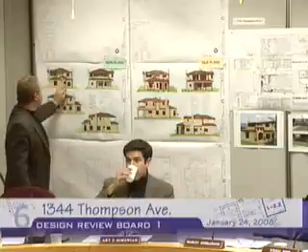So the archway can go up, and between the arch and where the roof starts, put a lantern right in the middle of it, on top of it.

So the windows become more of a strip, so there's no windows. We're taking these windows out from the turret. Can you clarify the lantern? The lantern would be on top of the archway, between the archway and the roof rafters.

Like a light fixture? Light fixture. Okay, I was misinterpreting that term, just a light fixture in between them.

They're going to be putting some light fixtures anyway, so I'm just saying we'll put one right in the middle of it. So it's not a sconce, but more like some kind of bracket with a gooseneck, or... Correct, now I understand.

Does that have to be a condition? It could be a recommendation. That's pretty specific on what type of lantern we're putting. Well, the only point is that if we don't put anything there, it becomes too simple.

If you have to make that a recommendation, we can. I think as a recommendation, because overall we haven't specified any other light fixtures, though for sure there will be light fixtures on the left and right elevation.

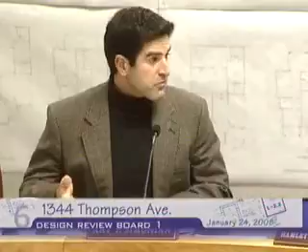Which I wish we had. My feeling is that he's done such a good job, and when it comes to picking light fixtures, he's probably going to use the same amount of effort. So I'm okay leaving it not that specific, personally.

Okay, that's fine. So you want to include specifically the treatment around the archway, for the tile and the precast? I think that would be great. Yeah, I have that.

Okay, let's go to roll call. Do we have a motion? I'll make a motion to approve the project with the attached conditions. I'll second. Mr. Eliano, yes. Mr. Yu, yes. Mr. Simonian, yes. And Chairman Surabian, yes. Motion passes 4-0.